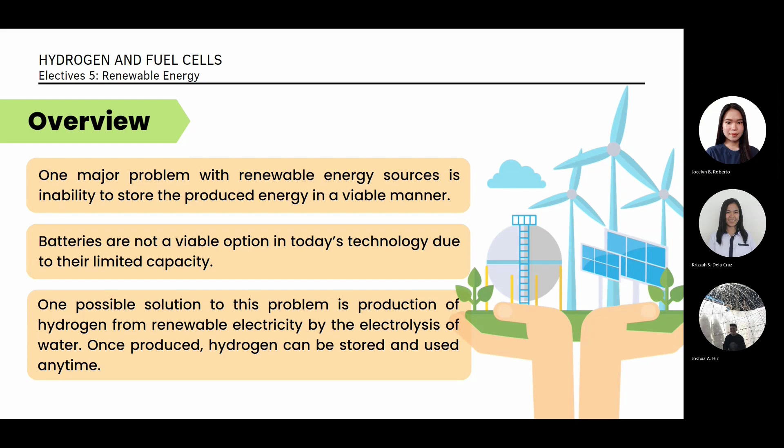Hydrogen is a colorless, odorless, nonmetallic, tasteless, highly flammable diatomic gas with the molecular formula H2. It is also the lightest element with a molecular mass of 2.016 kg per kmol. Hydrogen is a fuel with a higher heating value of 141,800 kilojoules per kilogram and a lower heating value of 120,000 kilojoules per kilogram.

Note, however, that hydrogen is not an energy source like coal, oil, and natural gas since there are no hydrogen reserves in the Earth. Although hydrogen is the most plentiful element in the universe, making up about three-quarters of all matter, free hydrogen is scarce. Hydrogen must be produced from other fuels such as natural gas or from water through electrolysis by consuming electricity. Therefore, hydrogen should be called an energy carrier rather than an energy source.

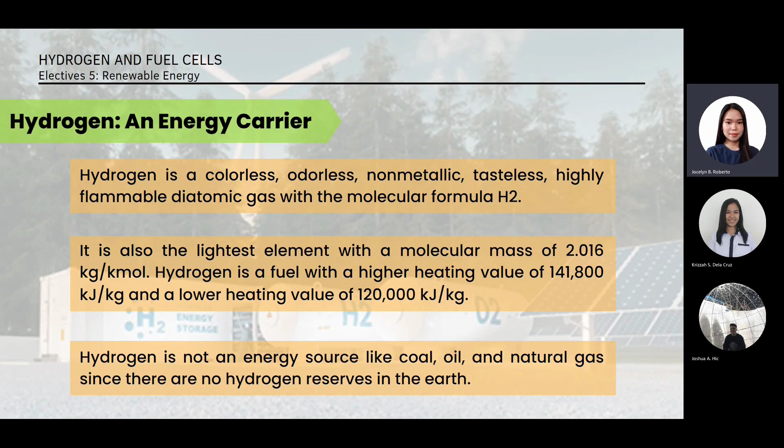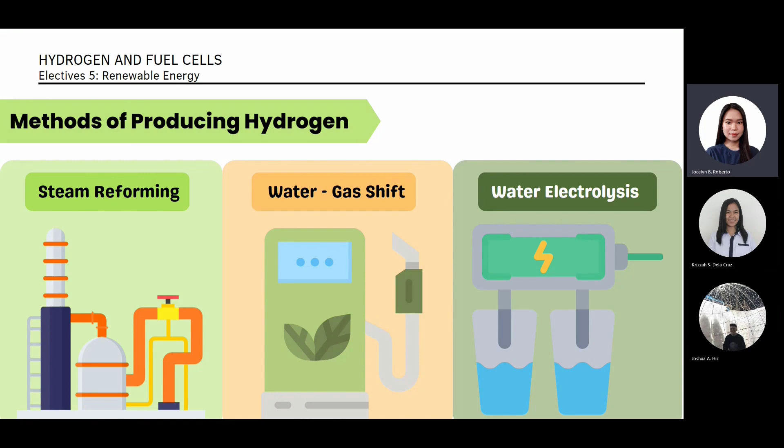The following are the methods of how we can produce hydrogen. First is steam reforming, followed by water gas shift, and lastly, the water electrolysis. The steam reforming is a much cheaper method of producing hydrogen compared with the water electrolysis. However, using a fossil fuel source for producing hydrogen is not a sustainable method. Most hydrogen is produced from natural gas through the process of steam reforming.

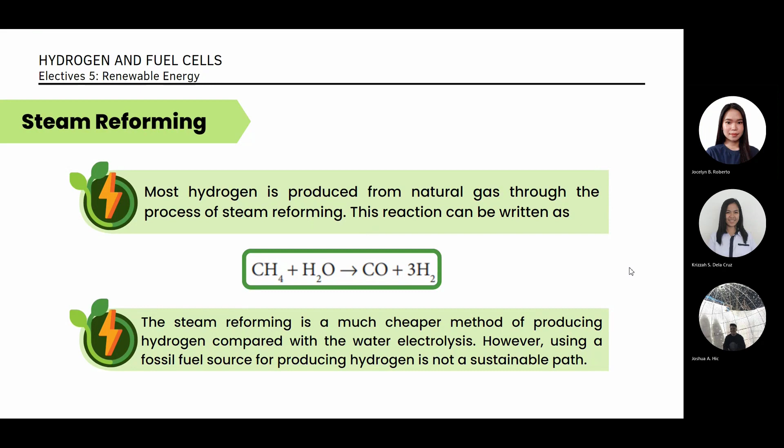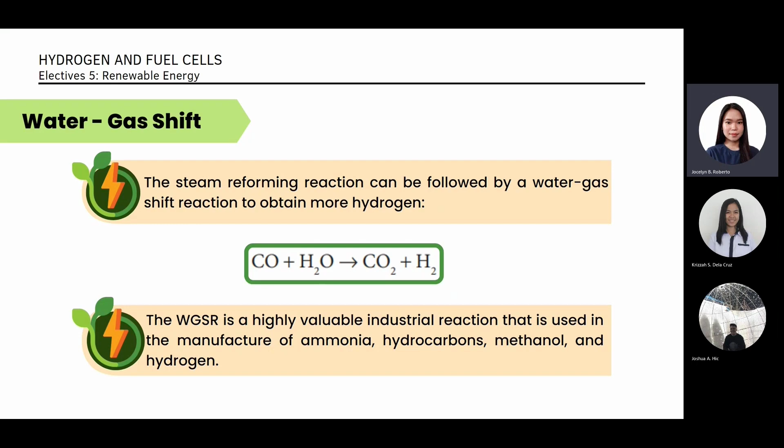The water gas shift is a highly valuable industrial reaction that is used in the manufacture of ammonia, hydrocarbons, methanol, and hydrogen. The combination of two reactions is given by this equation. Therefore, for 1 kmol, about 16 kilograms of methane used in this reaction, 4 kmol, about 8 kilograms of hydrogen is produced.

The steam reforming process is endothermic, requiring 206,000 kilojoules per kmol of hydrogen of energy input, while the water gas shift reaction is exothermic with an energy output of 41,000 kilojoules per kmol of hydrogen. The net result is 165,000 kilojoules per kmol hydrogen energy input. This is equivalent to 81,850 kilojoules or 22.73 kilowatt-hours energy input per kilogram of hydrogen produced.

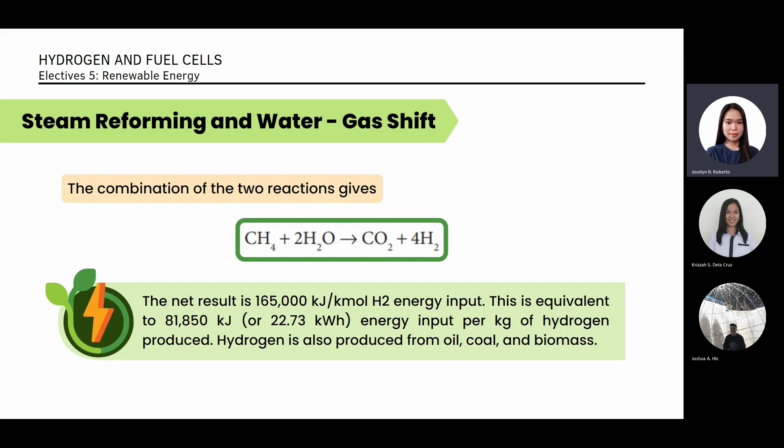Hydrogen is also produced from oil, coal, and biomass. The steam reforming is a much cheaper method of producing hydrogen compared with the water electrolysis. However, using a fossil fuel source or natural gas for producing hydrogen is not a sustainable path. We are primarily interested in water electrolysis since it allows the use of electricity generated from renewable energies. Nuclear electricity can also be used.

This reaction produces 1 kmol hydrogen, about 2 kg, and 0.5 kmol of oxygen, about 16 kg, when 1 kmol, about 18 kg of water is used. The minimum work required for this endothermic reaction is given by the Gibbs function of water at 25 degrees Celsius, which is equal to 237,180 kilojoules per kmol of liquid water entering the reaction.

This is equivalent to 117,650 kilojoules per kilogram of hydrogen produced by the reaction. Note that this is very close to the lower heating value of hydrogen, 120,000 kilojoules per kilogram. An actual electrolyzer involves irreversibilities, and the actual electricity consumption will be greater than this minimum value. The efficiency of a typical electrolyzer is about 80%. Therefore, there is no thermodynamic advantage of producing hydrogen through water electrolysis by consuming electricity. The reason is that we cannot store renewable electricity effectively by other methods.

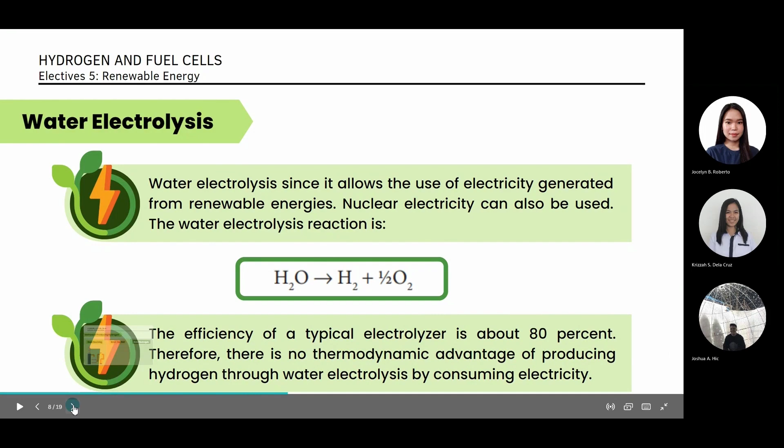For the production, storage, and utilization of hydrogen: as mentioned earlier, hydrogen is to be produced by an electrolysis process. Once produced, hydrogen can be used as a fuel for an internal combustion engine. It can be burned just like gasoline, or a fuel cell can be used to convert energy of hydrogen into electricity.

One of the greatest advantages of hydrogen is that the exhaust of a hydrogen engine does not contain carbon monoxide, sulfur, hydrocarbon, or carbon dioxide emissions. The exhaust of a fuel cell using hydrogen is water. Hydrogen is the primary fuel to power fuel cells. Fuel cell powered cars, bikes, stationary and portable generators, electronic devices such as computers and cell phones can all use hydrogen as the fuel.

A mobile phone powered by a fuel cell using hydrogen as the fuel can have several months of battery life compared to just several days with the current batteries. Hydrogen can be used in a variety of applications, including electricity generation plants and various industrial, commercial, and residential use.

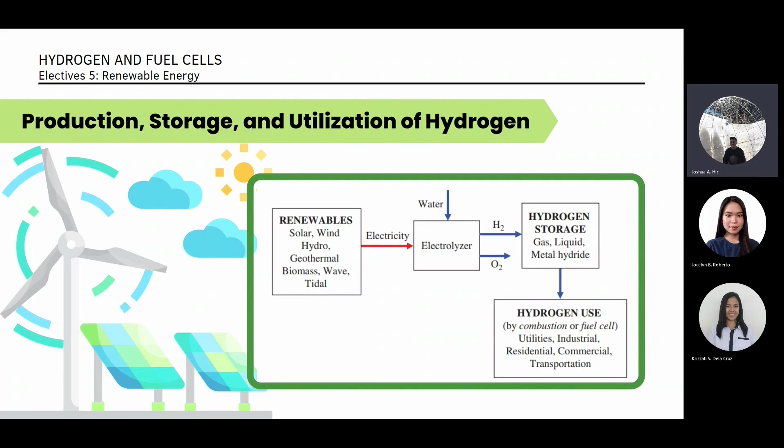Fuel cells. Fuels like natural gas, primarily methane, coal, and oil, are commonly burned to produce thermal energy at high temperatures for use in heat engines. For example, when methane at 25 degrees Celsius is burned with 50% excess air at 25 degrees Celsius adiabatically, the products will be at

1789 Kelvin. In other words, the work potential of the hot combustion gases is about 65% of the work potential of the reactants. It seems that when methane is burned, 35% of the work potential is lost before we even start using the thermal energy.

A fuel cell uses the chemical energy of hydrogen or other fuels to cleanly and efficiently produce electricity. If hydrogen is the fuel, the only products are electricity, water, and heat. Fuel cells are unique in terms of the variety of their potential applications. They can use a wide range of fuels and feedstocks and can provide power for systems as large as a utility power station and as small as a laptop computer.

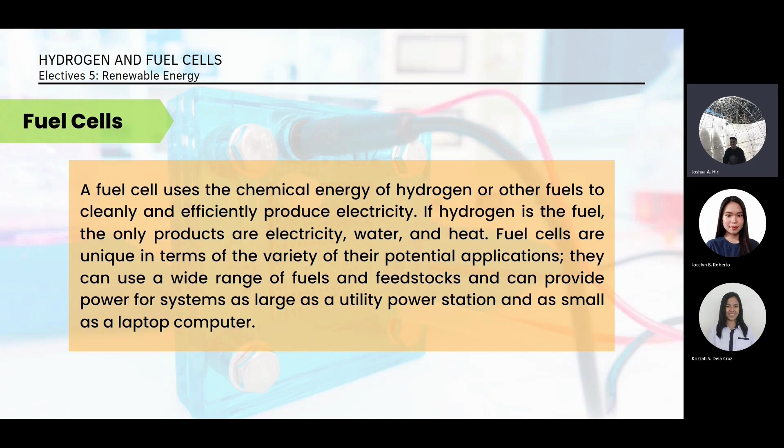A fuel cell functions like a battery, except that it produces its own electricity by combining a fuel with oxygen in a cell electrochemically without combustion and discards the waste as heat. A fuel cell consists of two electrodes separated by an electrolyte such as a solid oxide, phosphoric acid, or molten carbonate. The electric power generated by a single fuel cell is usually too small to be of any practical use.

Therefore, fuel cells are usually stacked in practical applications. This modularity gives fuel cells considerable flexibility in applications. The same design can be used to generate a small amount of power for a remote switching station or a large amount of power to supply electricity to an entire town. Therefore, fuel cells are termed the microchip of the energy industry.

As seen in the figure, the operation of a hydrogen-oxygen fuel cell is illustrated. Hydrogen is ionized at the surface of the anode, and hydrogen ions flow through the electrolyte to the cathode. There is a potential difference between the anode and the cathode, and free electrons flow from the anode to the cathode through an external circuit, such as a motor or a generator.

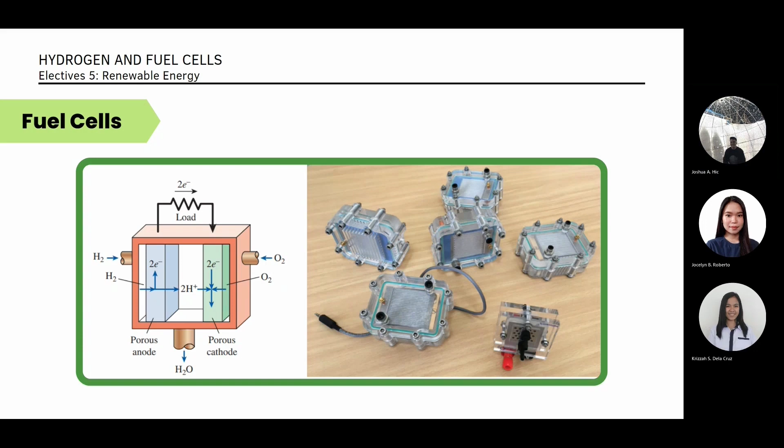Fuel cells are usually classified according to the electrolyte used. The main types are briefly described based on Hodge and the Department of Energy. Types of hydrogen fuel cells. Proton exchange membrane fuel cell, or PEMFC. It is also called polymer electrolyte membrane fuel cell. This fuel cell contains a thin plastic polymer membrane which is coated by platinum particles, acting as the electrolyte.

The operating temperatures are low, and an important advantage of PEMFC is its small size for a given power output. The power output can be varied easily depending on the demand, which makes this fuel cell the best candidate for automobiles. Stationary power generation is another good application for PEMFC.

Second, direct methanol fuel cell. This fuel cell uses a polymer membrane as the electrolyte. It uses the methanol directly in the cell. These fuel cells can be used for powering laptop computers and battery rechargers such as in cell phones.

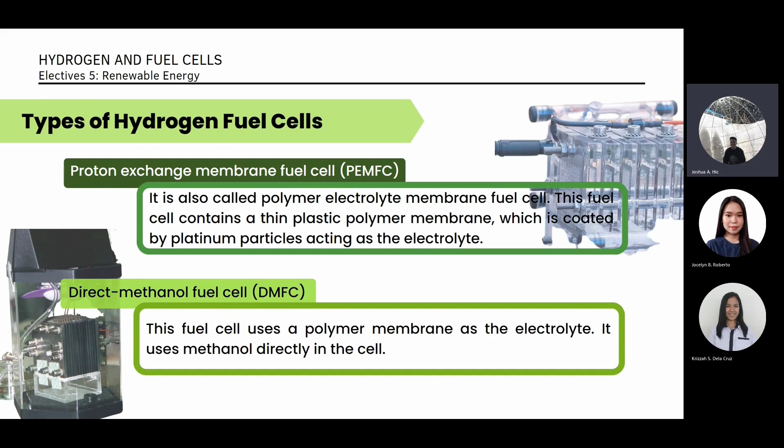Alkaline fuel cell, or AFC. This type of fuel cell uses potassium hydroxide or an alkaline membrane as the electrolyte. They operate between 20 and 250 degrees Celsius with efficiencies of up to 60% at low temperatures. Alkaline fuel cells require pure hydrogen as the fuel, which is expensive. As a result, their application is mostly limited to space applications to produce electricity and water. Potable water production is a new application for alkaline fuel cells.

Phosphoric acid fuel cell, or PAFC. Phosphoric acid is used as the electrolyte while platinum is used as the catalyst. Porous carbon electrodes are used in both cathode and anode. The operating temperatures are about 200 degrees Celsius. Their current thermal efficiencies are between 35 and 45%.

PAFCs are mostly used in stationary power generation with power outputs of greater than 400 kilowatts. Ideal applications include hotels, stores, hospitals, and other buildings for which rejected heat from the fuel cell can also be used for useful heating purposes.

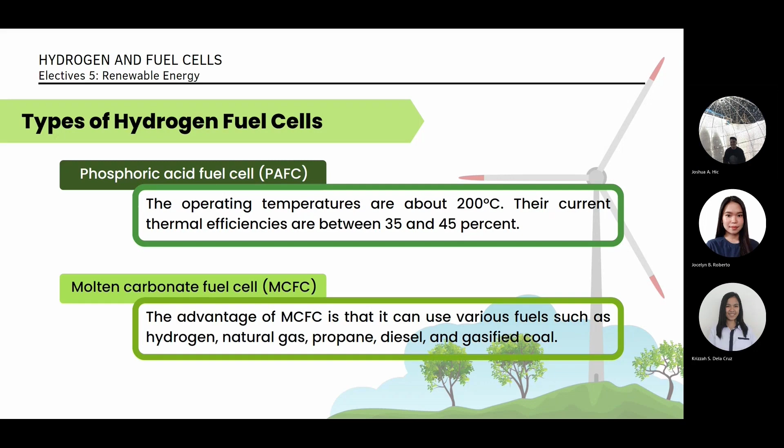Solid oxide fuel cell, or SOFC. Phosphoric acid and molten carbonate are highly corrosive, which causes material problems and reduces cell life. A thin layer of solid ceramic material is used as the electrolyte in SOFC, allowing reliable design at high temperatures. They can use carbon monoxide, hydrogen, and gasified coal as the fuel. Natural gas can also be reformed into hydrogen within the cell.

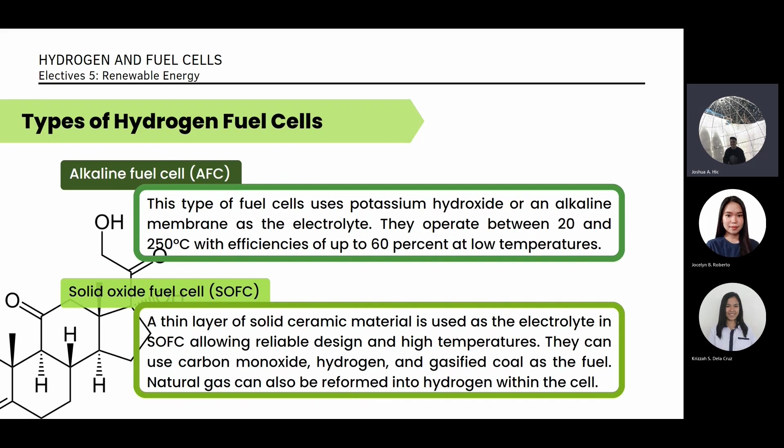Next are the applications of hydrogen fuel cells. Fuel cell powered cars, bikes, stationary and portable generators, and electronic devices can all use hydrogen as the fuel. With this, fuel cell vehicles fueled by hydrogen are now being introduced to the market by major car companies.

In most engineering student competitions, hydrogen cars use the technique of storing hydrogen in a metal hydride solid. Cooling a hydride allows absorption of hydrogen while heating it slightly releases hydrogen as a gas.

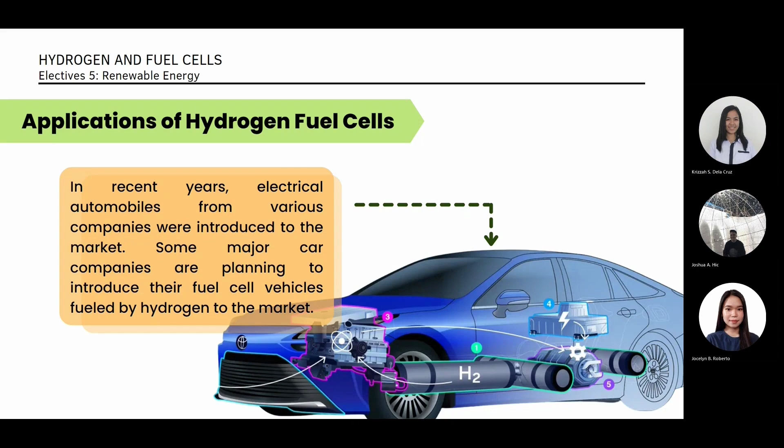So in this slide, we can see the comparison between hydrogen fuel cell cars and electrical cars powered by lithium-ion batteries. First, the heating value or energy value of a substance is the amount or quantity of heat released during the combustion of a particular amount of that substance. So with this, hydrogen fuel cars have a lower heating value amounting to 120,000 kilojoules per kilogram, while lithium-ion batteries have a specific energy of 41,000 kilojoules per kilogram.

So storage is difficult for both hydrogen and lithium batteries. The containers are very heavy compared to the weight of hydrogen and lithium themselves. So for lithium metal, a safe storage is needed to prevent runaway thermal events leading to combustion.

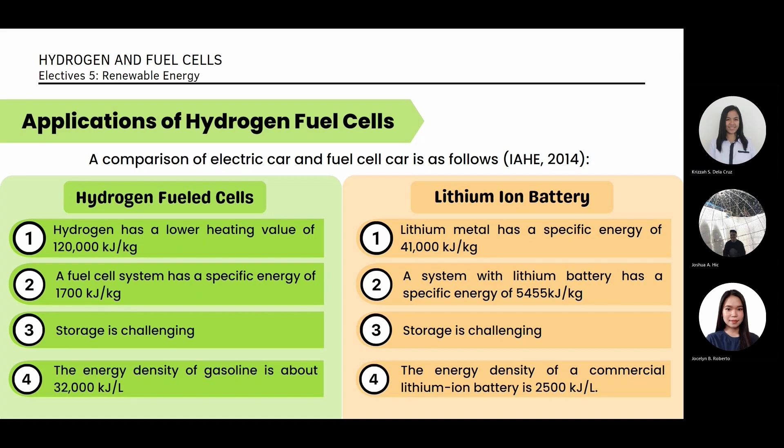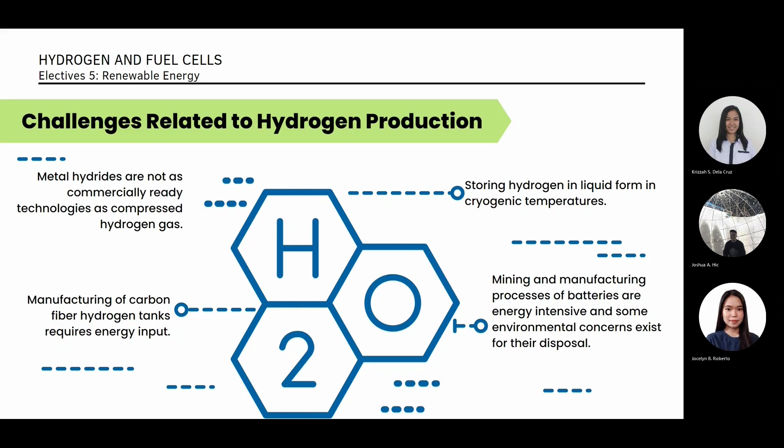So lastly, many studies are being conducted to address the issues of hydrogen production and distribution. So here are the long-term solutions to hydrogen distribution. So first, to power hydrogen fuel buses, automobiles, bikes, and equipment, a number of hydrogen refueling stations are now available. Japan has 91 public hydrogen refueling stations. Germany has 45 and another 11 private stations, and USA has 40. So with the total number of 328 refueling stations in the world, Germany is planning to increase the number to 400 by 2023.

Next, a possible long-term solution to hydrogen distribution structure is the formation of national hydrogen pipelines. So this can only be justified economically with a widespread use of fuel cell automobiles on the street. Also, for locations without any hydrogen fuel infrastructure or fueling stations, local electrolysis and reformation based technologies can be used.